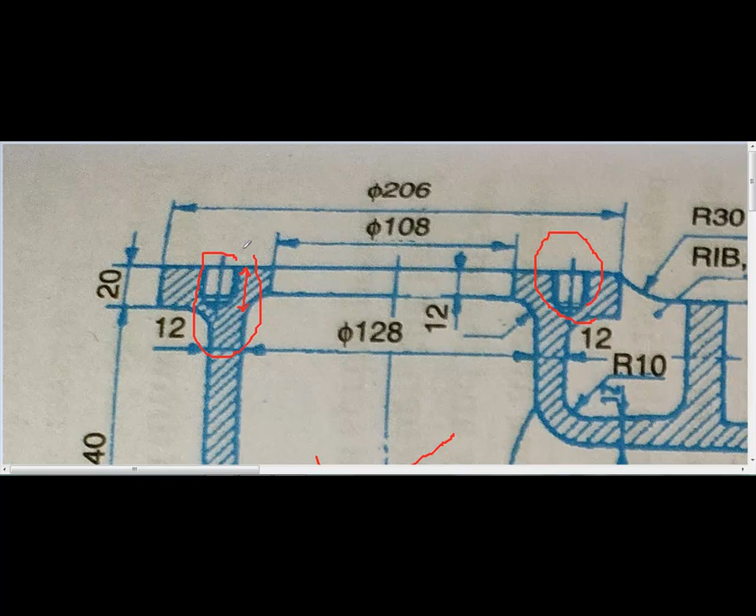Deep 17 means depth of that hole. If you see here, I am zooming in, the depth of that hole is how much? It is 17 mm, which is showing here. This is what the 17 is there. And PCD stands for pitch circle diameter, that is 152.

It is 152, it is a pitch circle diameter. 152 means which diameter it is? This is the diameter of this circle. How much it is? This is a 152 pitch circle diameter. That circle is showing the center line.

152 means on that circle how many holes are there? Tapped holes are there or threaded holes are there? Total number of 6 holes are there on that circle.

If you see here, only half view has been shown. It is not a sectional view, it is a half view shown here. Why half view? Because this side view is symmetrical to this axis. Means exactly below this axis you will get the same type of view which is there above the axis, like this. Same type of view is there.

So they have drawn half view here, that is half top view is there. This is the top view, and this one is the front view of the body of the feed check valve. If you see the dimensions, important dimensions which we required here, all dimensions are given.

Right? Now after calling the part number 1 while preparing the assembly, what could be the second part that we need to decide here? While making the assembly we should know the use of each component, as well as we have to study thoroughly what dimensions are given in the particular details or in assembly. We have to match those dimensions. If we could match the dimensions, then it is very easy to make the assembly from the given details.

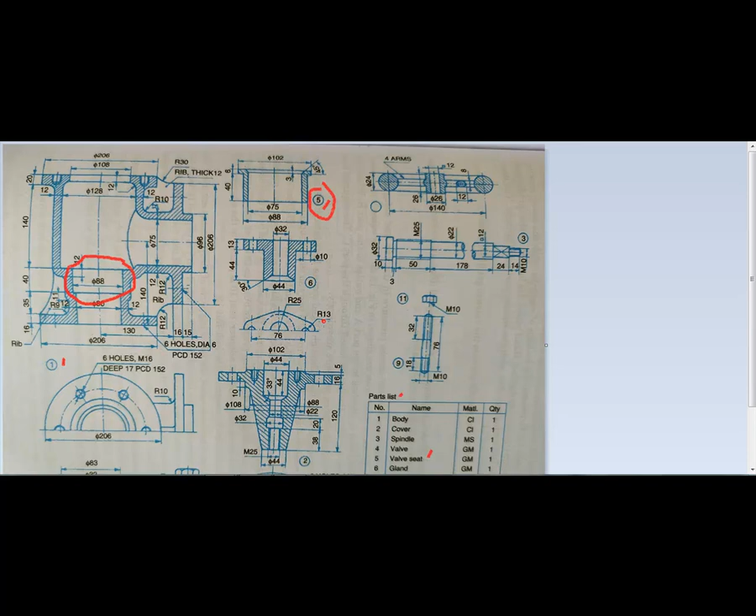So the part 5, this is what part 5 is. We have assembled part 5. This is part 5, right? So what could be the next part? We have assembled 2 parts so far from the given details. What could be the next part? That is part number, we need to check it out here.

Which dimensions are matching with the assembled parts of details? If you see here, yes, again this is ϕ88, this ϕ88 is there. So we have assembled these 2 parts, as well as this is ϕ75, isn't it? This ϕ75 is there. So what is it, valve seat. The name of this part, if you see in the part list, it is valve seat. So valve seats are used to allow valves to sit on it.

So valve seats, what is the use of valve seats? Valve seats can be allowed to sit valves on it. So this is part number 4, the name of that part is valve. So valve can sit on the valve seat. Valve can sit on the valve seat. So that is the application of that. This valve can sit on this valve seat. So valve seats are used to allow valves to sit on the valve seat, isn't it?

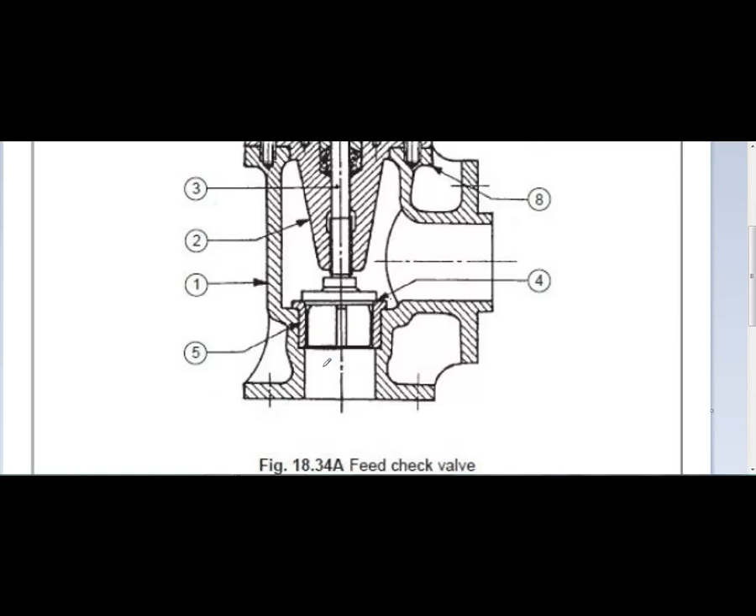So we will see here in the assembly. Yes, if you see there in the assembly, this is part number 4 I am showing here. Part number 4, which is sitting inside of this valve seat. This is the valve seat, and this inside portion is the valve, isn't it? So we could assemble 3 parts so far.

So the first part which we have selected here, that is the body. Part number 2, that is valve seat, we have taken as part number 5 sequentially. The next part which we have called while making the assembly is part number 4, isn't it?

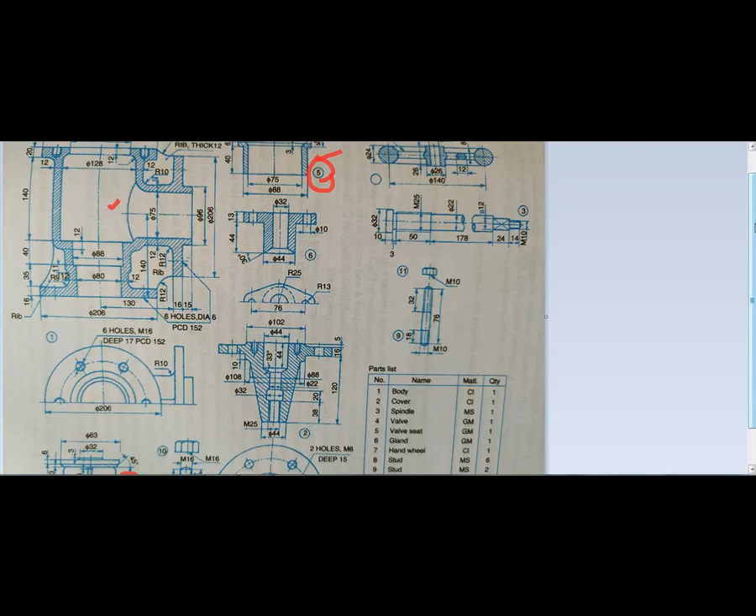Now three parts from the given details we have assembled. So what could be the next part in the assembly? That we need to decide here. If you see, this 88 mm is the diameter, this 88 mm is matching, and we could assemble valve in valve seat.

This is the front view of part number 2, and this one is the top view of part number 2. So if you see, this is the diameter of part number 2.

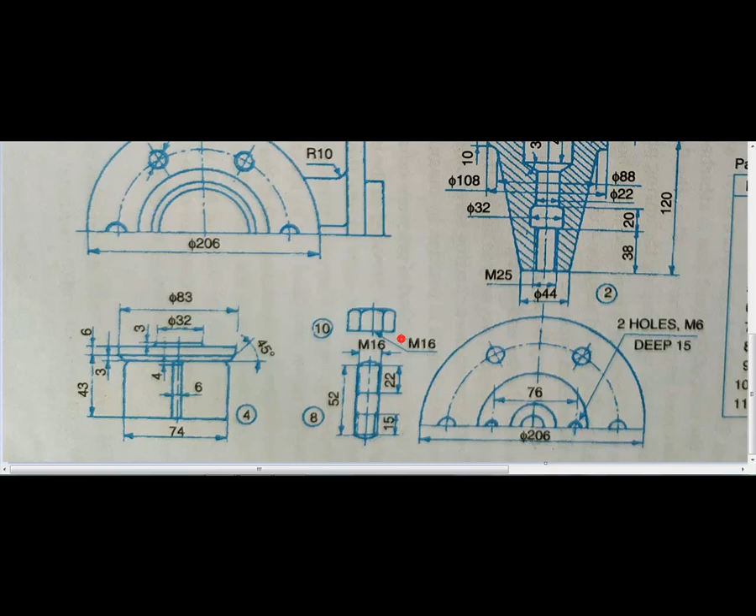The name of that part is cover. If you see here in the part list, this diameter is ϕ206, and if you see there, ϕ206 as well as the 2 holes are there. These holes, if you see, again these holes which I am showing here, these are total 6 number of holes on the cover.

But in this view they are not showing the dimensions of that hole. It is not shown here, but we need to understand. If we know the application, we can understand it very easily. These are the total 6 number of holes. I am showing those holes.

These are the 6 number of holes. So these 6 holes are matching with the holes which are present on part number 1, that is body. These holes are there, isn't it? These holes are matching with these holes on part number 1. That is, holes of part number 2 are matching with the holes on part number 1.

So if you see, those holes are placed at a distance of PCD, that is, PCD is what? 152 mm is the pitch circle diameter. On that 152 mm circle, these 6 holes are drilled. It is not a threaded hole, these are all simple holes.

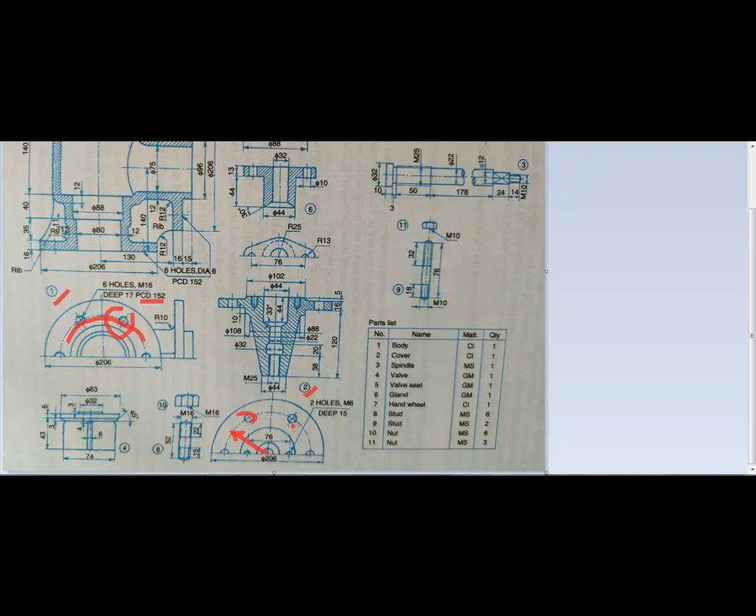So the first part which we picked and selected while making the assembly is part number 1. In the second sequence, we selected part number 5. In the third sequence, we selected part number 4. And in the fourth sequence, we are selecting part number 2.

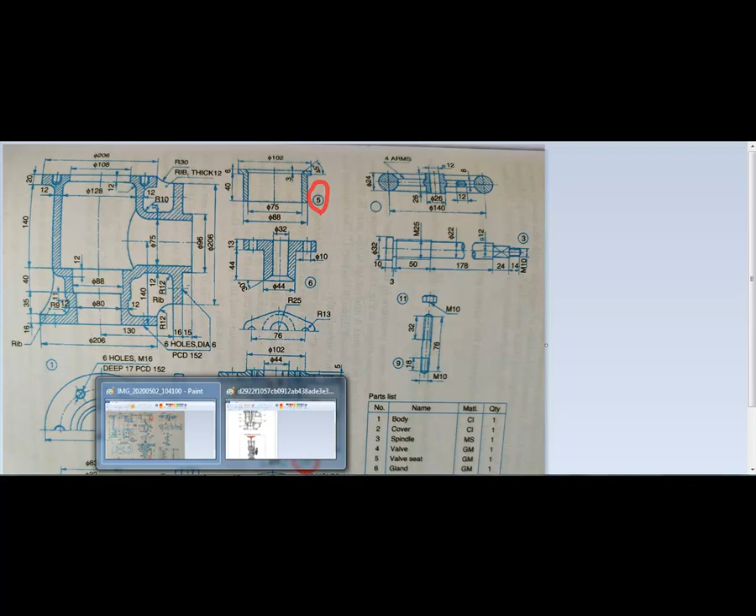So we have to assemble part number 2 on this body. We will see here in the assembly. Yes, this is part number 2 as per our details. I am showing it. This is part number 2 as per our details, and that part number 2 is assembling with the help of these studs.

These are the studs, and a nut arrangement is there. With the help of this stud and nut arrangement, part number 2 is assembled with part number 1. So how many holes are given there? For it, 6 number of holes are given. These are the 6 holes.

So for making the assembly of part number 2 with part number 1, we have to use a stud and nut arrangement. So how many studs are given? If you go here in the part list, for part number 8, this is part number 8. Material is MS, and 6 quantities are there. The name of that part is stud, meaning this stud is assembling with part number 2 and part number 1.

To join part number 1 and part number 2, we are using part number 8, which is a stud. Where is part number 8? This is part number 8 in details, and the quantity of that part is 6. We are also using a stud and nut arrangement to join part number 2 with part number 1. We have used the stud. Where is the nut? We need to find it here. Yes, nut—if you see part number 10, nut is there, material is MS, and quantity is 6. Means this 6 quantity and this 6 quantity.

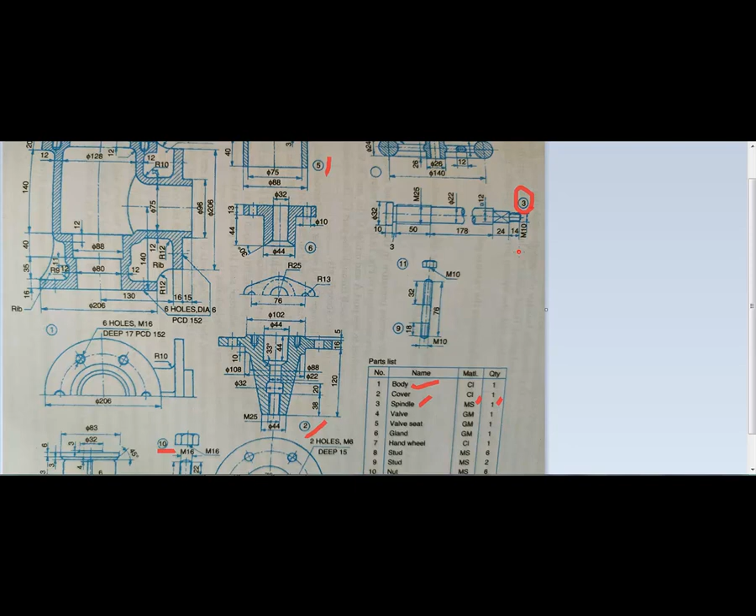So what could be the part which we are calling at the 7th sequence? That we need to find out here. That part is part number 3, which is the spindle. If you see the part list here, the spindle is there, material is MS, and quantity is again 1. So that part number 3 we are calling at the 7th sequence to make the assembly of part number 3 with the main assembly.

So if you see the dimensions of the spindle, what dimensions are given here. The head dimension of the spindle is φ32. And from this edge to this edge, the total length given is 178 mm from this edge to this edge. This segment is of 24 mm, this segment is of 14 mm, and this is the segment there.

This is a segment of 14 mm length whose dimension is M10, meaning it is a threaded portion. External threads are provided here. As well as on this portion, this is also a portion of external threads, and the dimension of that external thread is M25.

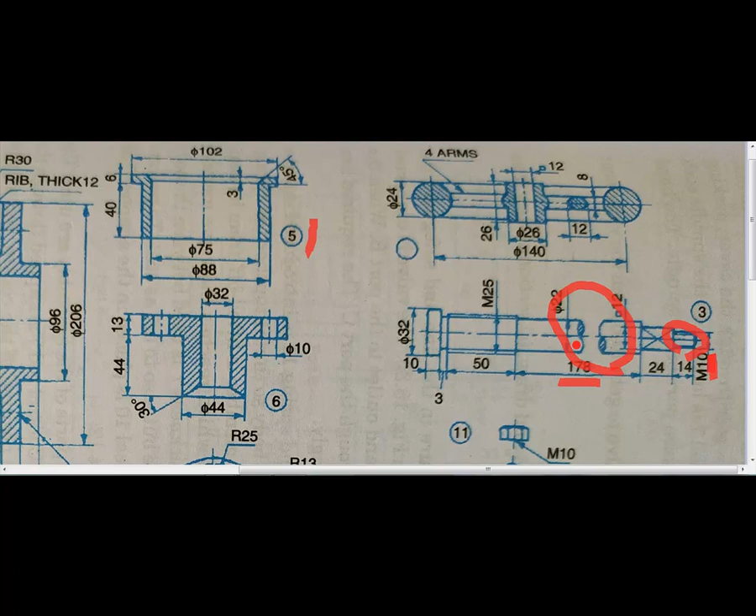And you may have a query in your mind: what is this? If the total length is 178 mm, then why is it broken? This is a way of showing the dimension—178 mm is the length of that segment. But since it would take more space on your drawing sheet, this is a way of showing a dimension: this portion is broken out. It is shown in the broken-out way. This segment of length 178 mm is shown in a broken-out way to avoid unnecessary use of more space on your drawing sheet. Actually it is a continuous segment, but this is the standard way of showing a drawing on a drawing sheet, you can say. If you have any doubt related to this segment, you can call me, you can ask me.

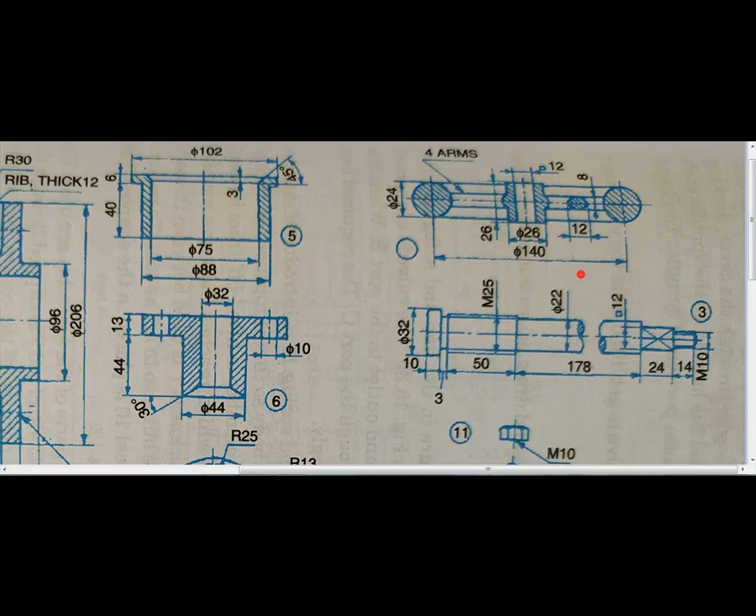So in the 7th sequence, part number 3 will come. If you see there in the assembly, it will come like this.

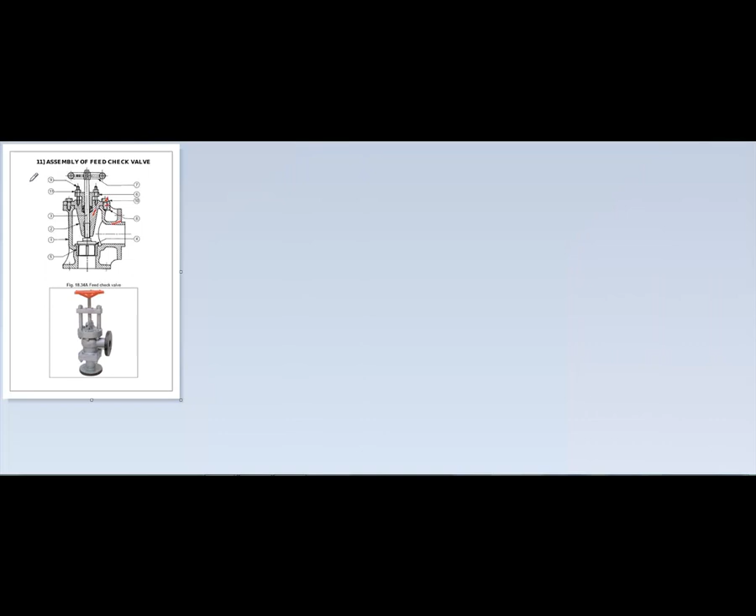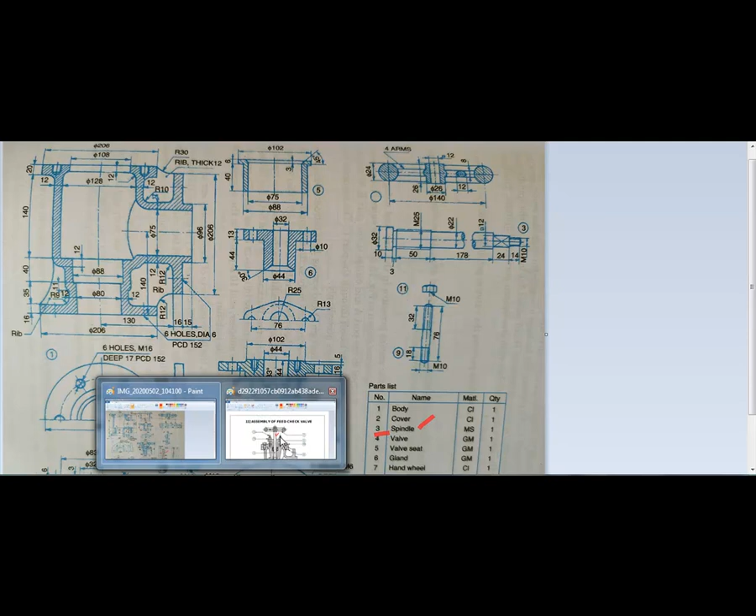So this is the part we are calling the 7th sequence. In the part list, the number of that part is 3, it is a spindle. So that part we have called here. So the 7th part we have assembled so far.

Total number of parts given in the assembly details is 11 parts. So what could be the next part? The next part in the assembly, if you see there...

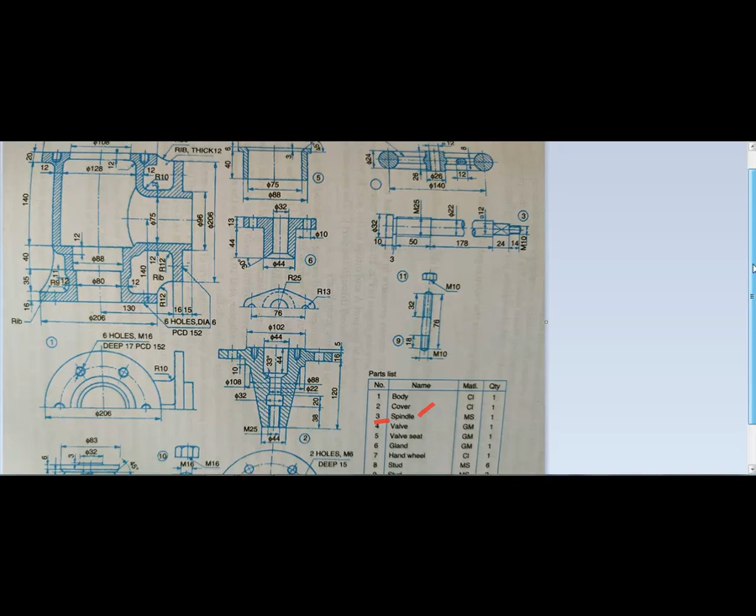The dimension of the spindle is φ32, as well as the dimension on part number 6, it is a gland, is 32. This 32 mm dimension is there, isn't it? Yes, this 32 and this 32 are matching with each other, isn't it?

Means this part number 6, it will get on the part number 3. Means this part number 3 will get inserted in part number 6. It will get inserted in part number 6, as well as if you see there...

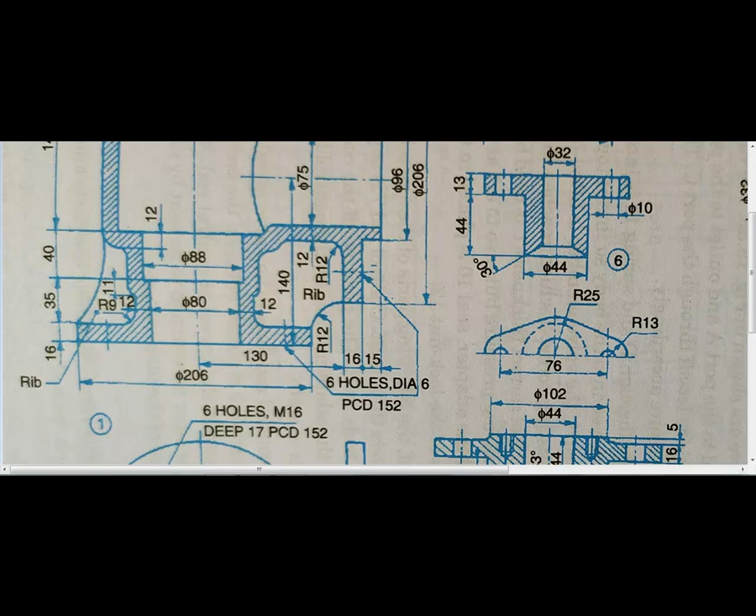There are 2 holes which are provided here on part number 6. The size of that hole is φ10, and the distance between the two holes given here - this is the front view of part number 6, that is gland, and this is the distance between these two holes shown in the top view - that is 76 mm distance between these two holes.

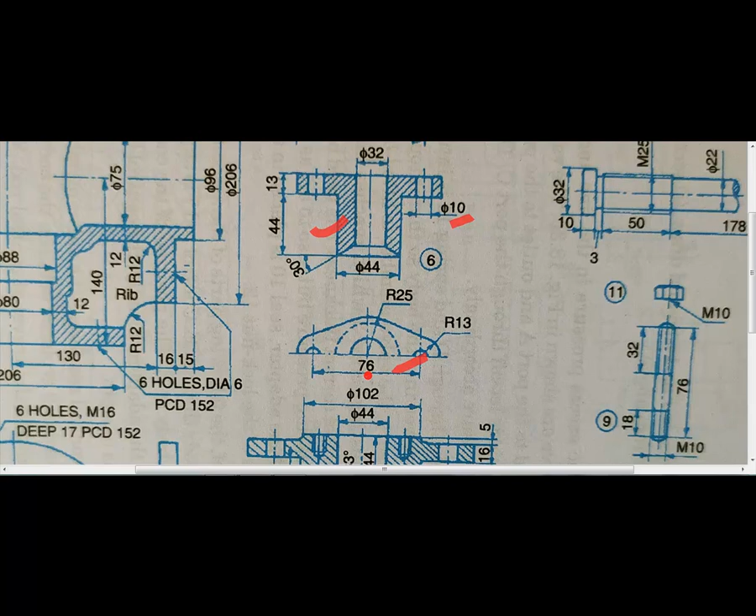If you see here for part number 2, that is cover, it was there. In the top view of part number 2, two holes are provided here, and the distance between the two holes is again 76 mm. These are the two holes provided here on part number 2, that is cover.

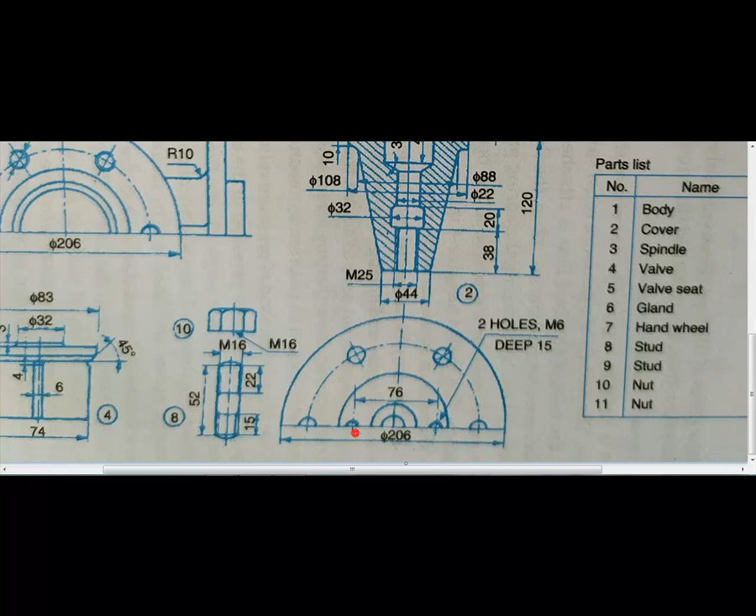Means these two holes are matching with the holes provided here on the gland. These are the two holes, isn't it? So if you see there in the assembly, again I will show you the assembly.

This is the axis of the hole present on the gland, I am showing here with the red line, and this is the axis of the holes present here on the cover. So these axes are matching with each other, that is a coaxial condition, same axis for both holes. These two parts, the gland and the cover, are assembled with the help of a nut and stud arrangement.

So the next part we are calling here while making the assembly - the remaining parts are part number 9 and part number 11. Part number 9 is a stud, and part number 11 is a nut. So the total quantity of part number 9, if you see there, 2 quantities are there, and for part number 11 nut, again it is a mistake here, actually there should be 2 quantities, not 3 quantities.

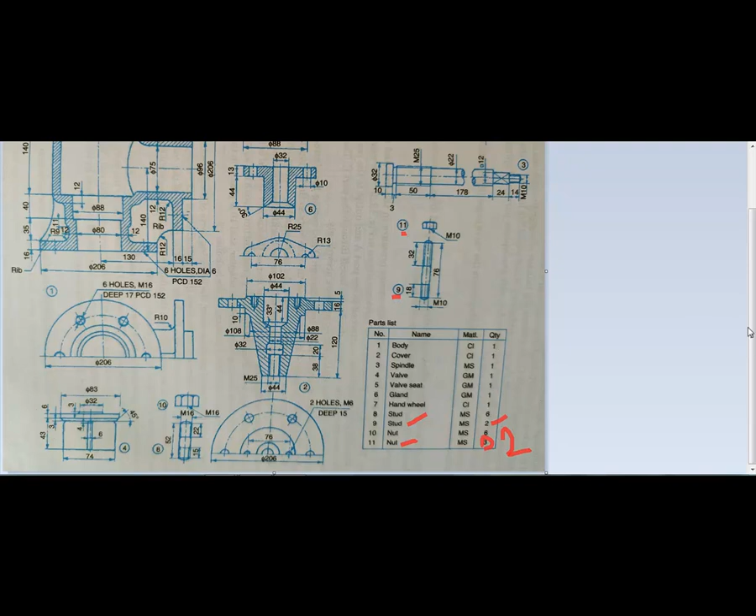So 2 quantities are there. Wait, sorry. So yes, these 3 quantities, they are given right, 3 quantities are right. So for part number 9 stud, mild steel is the material, 2 quantities are there. For part number 11, the nut, material is mild steel, total quantities are 3.

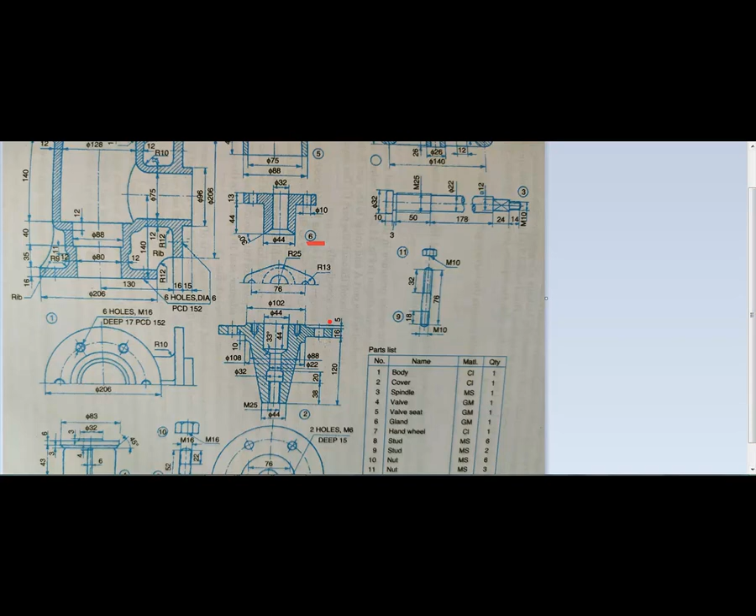So part number 6 and part number 2 are joined with the help of this stud and nut. You can see here in the assembly. So this is a nut and this one is the stud, isn't it?

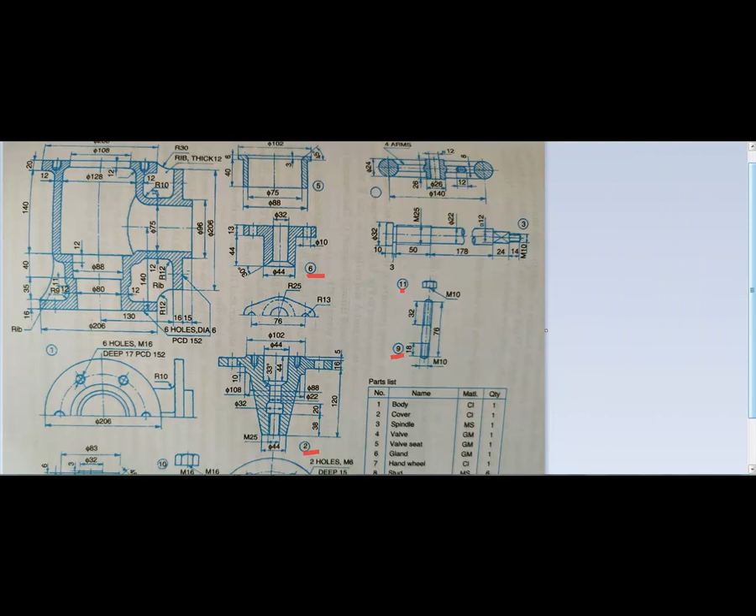So the next part which we are calling here - this part we have used while making the assembly is part number 1.

Parts 2, 3, 4, 5, 6 we have called in the assembly. Part 7 we have not called in the assembly so far. Parts 8, 9, 10, 11 we have called in the assembly, but only 2 nuts we have used so far, 1 nut we have to use again.

So total number of quantities are 3, 1 nut we have to use again. So the next part which we have to call here is part number 7, that is the hand wheel. That part we are calling while making the assembly.

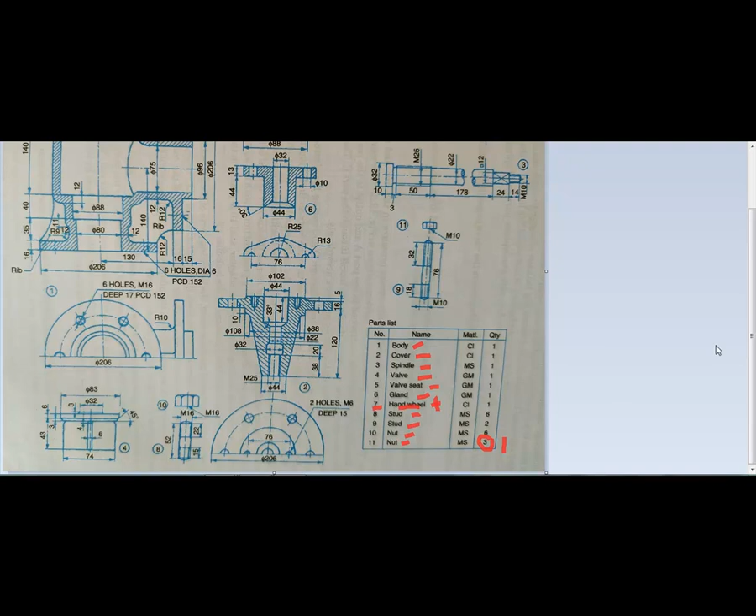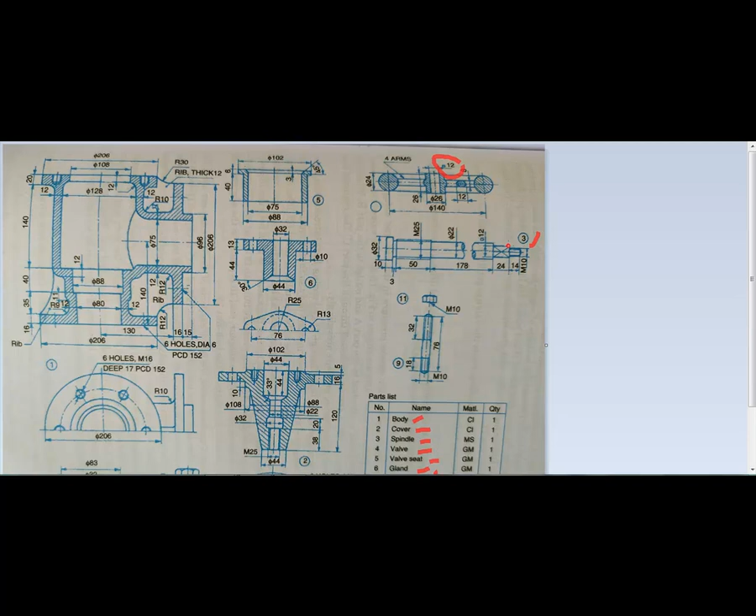Yes, this is 12 mm, that portion is 12 mm. And if you see there on part number 3, that is the spindle, this portion I will show you here.

This portion is having a diameter of 12 mm, and the 12 mm on the hand wheel, these are matching to each other. These are not diameters though, this is the square portion. The square symbol is showing here, as well as here.

These are not diameters, it is a square portion. This portion which is showing here in the hand wheel is a square portion. Again, this is a square portion. So the portion of the hand wheel will get onto this portion of the spindle.

And if you see there, the total height of this portion is again 24 mm, and the height of this portion is again 24 mm. So if you see there in the assembly, this is the portion which gets inside of the hand wheel.

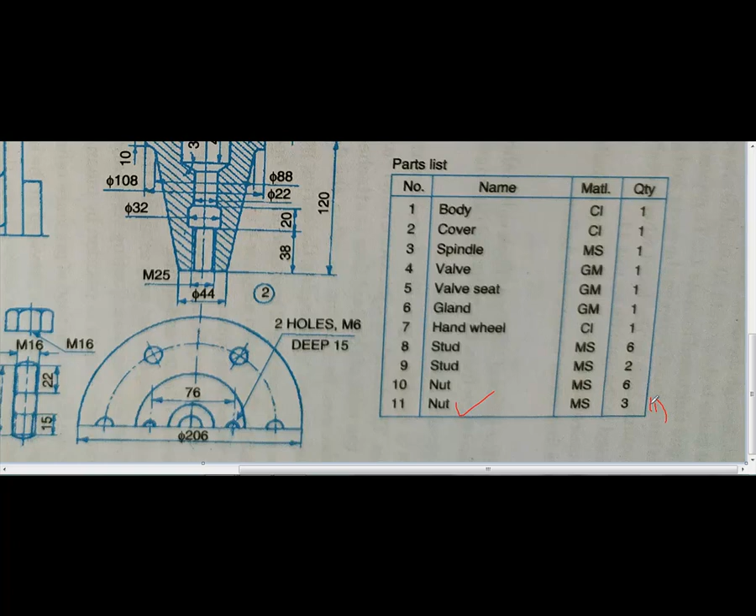And the locking of this hand wheel with the spindle is made with the help of this nut, that is part number 11. Last nut we have to use here, that is 3 quantities were there, 1 quantity we have to use it here. And that 1 quantity we are using to make the locking of the hand wheel with the spindle, that you can see here in the assembly. This is the nut we have used here.

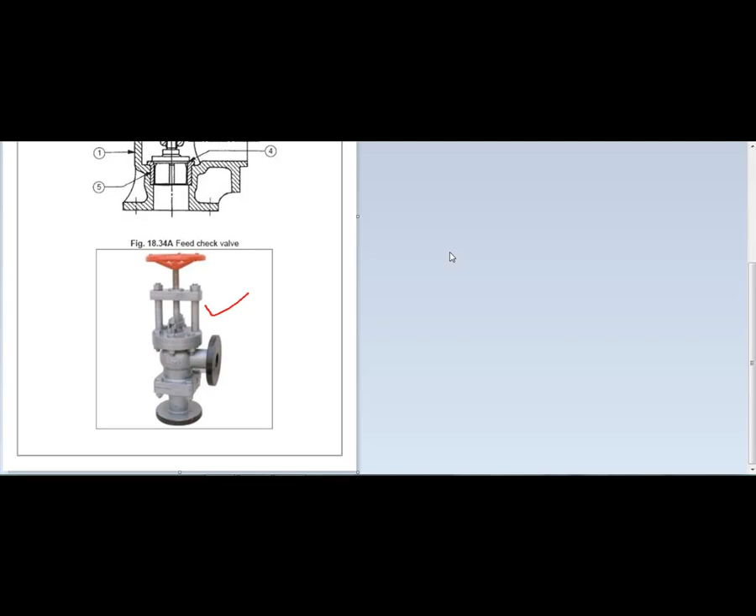So my dear students, I hope you have understood. This is the 3D model of the feed check valve, you can see it here. I hope you have understood how to prepare the assembly from given details for the feed check valve.

And while preparing the details from a given assembly, you have to go in the reverse direction. You have to select the components one by one from the assembly. Suppose this assembly is given to you as a question, and you have to prepare the details.

So you can check how many parts are there by using this balloon. Total number of parts, with the help of this balloon, is 11 parts. You can separate out those 11 parts one by one, and if you prepare the separate drawing of each of those 11 parts one by one, that is your details.

That's all, nothing new here. So you have to go in the reverse direction, as what we did here in the case of assembly. While preparing the assembly, we gathered all the parts sequentially and got one product, which we call an assembly. How to prepare details? You have to go in the reverse direction.

You have to separate out the parts one by one, pick up the parts, and prepare the separate drawing of each part, and that is your detail drawing. I hope you have understood the assembly of the feed check valve, how to prepare the assembly from details, and how to prepare the details from a given assembly. If you have any doubt, please share it with me.